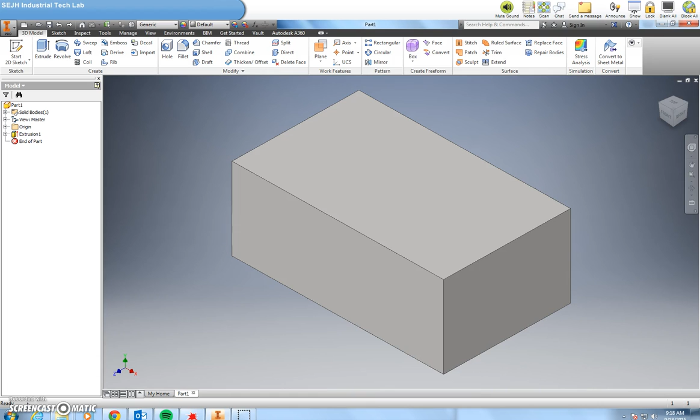Let's do number 2. I've created a 3 by 5 by 2 inch block, and I will show you the 3 ways in which we could do this. Start a sketch. Let's try the top to start.

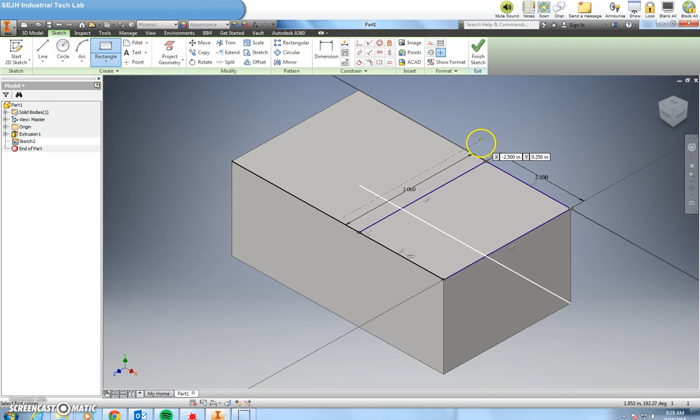Choose my home view to get back into a nice isometric or 3D view. I'm going to use my rectangle tool and draw a rectangle from this green dot corner. I'm going to make the rectangle a 2, tab 3, which will grab that entire piece. I'm going to then finish the sketch, choose extrude, and push this down 1 inch.

1 is already in the box, but I could change that to a number if I wanted. If I say OK now, I have completed number 2 by drawing a rectangle on the top and pushing it down.

I'm going to cancel this and back up using my backwards arrow, and I'm going to draw it from this face. If I did it from the face, I'm also going to use my rectangle tool.

This time I'm going to choose this corner and open up my box, and I'm going to use the blue box needs to be a 2 tab 1 to create the proper size rectangle to remove. Finish it, choose extrude,

reverse the arrow. Now if you take a look at number 3, I'm actually doing number 3 without trying to. I actually want to make this distance say all, and you'll notice it pushes the entire thing. So you could have easily made 3 using this technique as well.

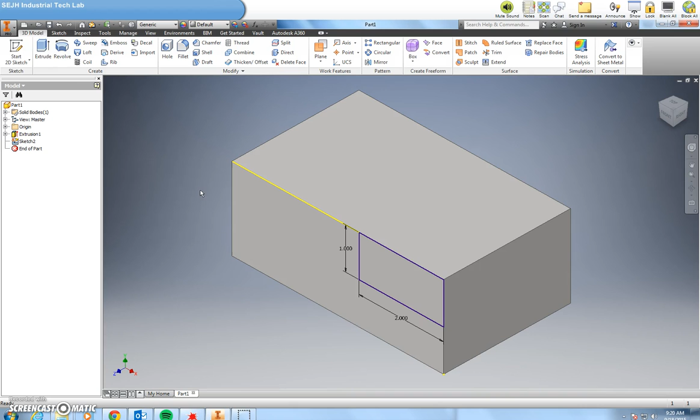I'm going to hit cancel though and show you one more way. We'll draw it from the right side face. Start a sketch on that face. Go back to home view.

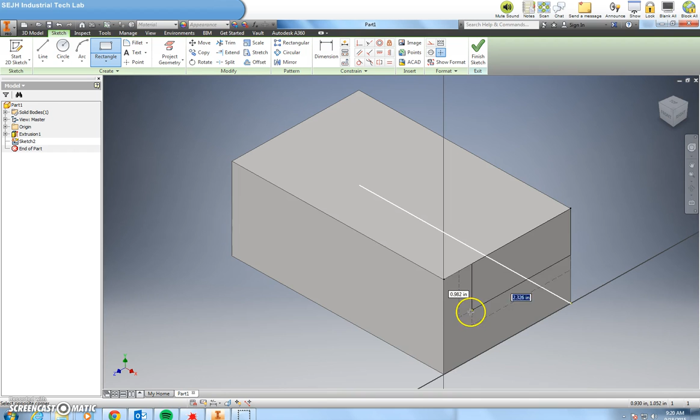This time draw a rectangle from either this corner or this corner. Doesn't matter as long as it's large enough. A little trick here is I can bring my mouse all the way to the edge and touch this line. It forces the blue box to be 3.

I'll hit tab even though my number says 1. It's just by luck and by the fact I'm touching the green dot, which is the halfway spot. So I can type 1 and enter and make that a 1 by 3. Oop, let me do this again, I did not hit enter.

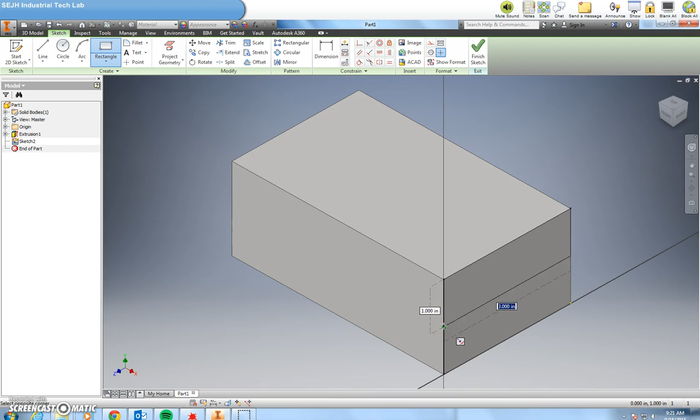There. Next, finish the sketch and push this one the other direction. Not enough though, 1 inch will not do it, so I need to change this number to 2. Because if you looked, it would not have created this proper shape.

Okay, at that point, I can say OK. And I showed you 3 different ways to make number 2.